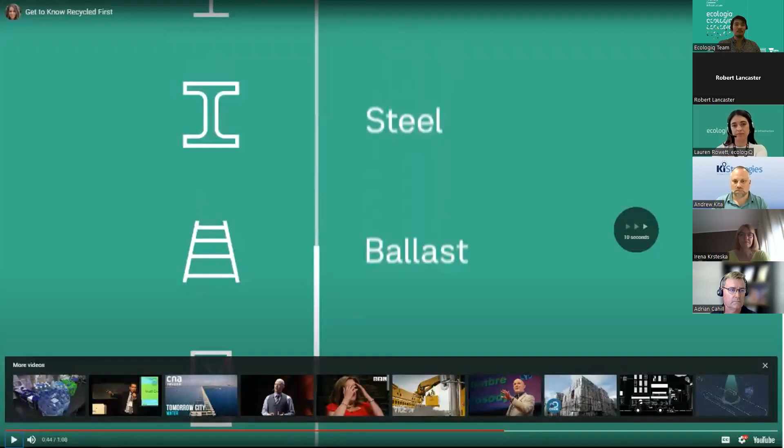But where does the change to green thinking begin? The Recycled First policy. Recycled First will require transport infrastructure projects to optimise the use of Victorian crushed brick, crumb rubber and reclaimed asphalt pavement, taking precedence over virgin materials.

For information, technical advice and support on bringing your sustainable project innovations to life, drop ecologiq a line. Recycled First, supporting purposely greener infrastructure.

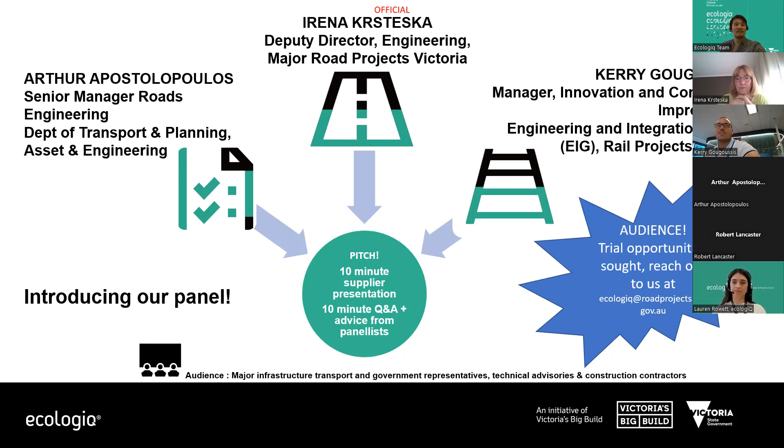So as you can see, very much a collaborative approach. These events are very much a call to action, because out there in the audience, you're working on live projects. There's opportunities to really push innovation, drive the uptake of these materials beyond compliance, as well as making them business as usual. Whether you're an asset owner, or working with design, engineering, construction, the ecologiq here is very much about leveraging the big build opportunity and your projects to see circular outcomes for Victorian industry.

So I just want to go through a quick whirlwind tour of previous showcase participants. About 2 years ago, when we kicked off this series of events, we had a social enterprise called OC Connections put forward the idea of collecting old road bollards to convert them back into new ones. They launched at the end of last year. That's now available, so you can go onto their website, and we're happy to see these bollards starting to be rolled out across the big build, as well as Melbourne Airport and some other areas.

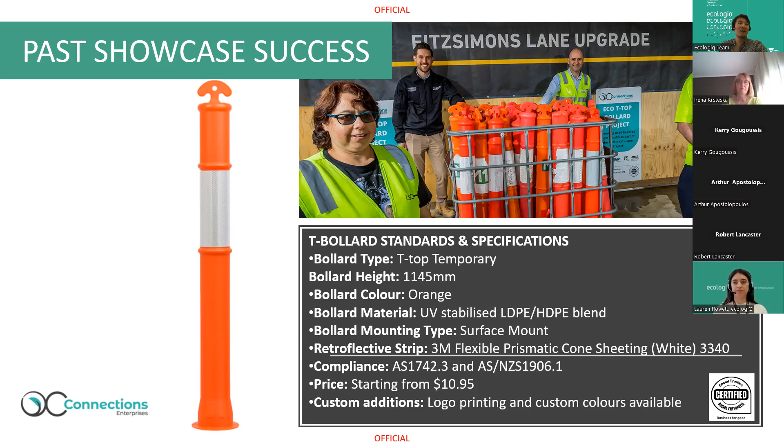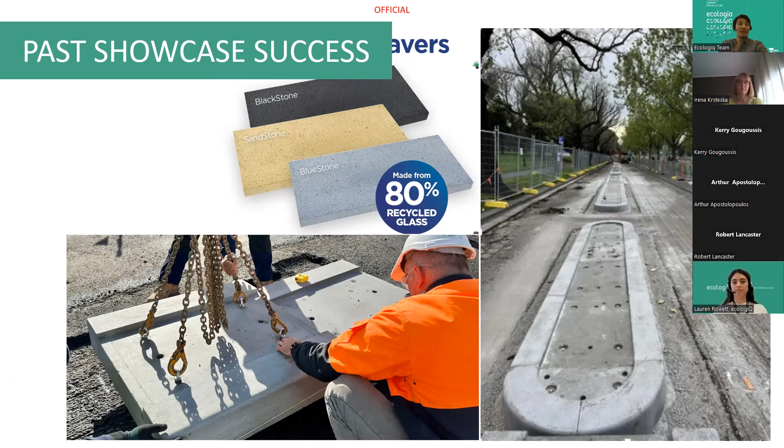Through the series, we've worked with the Plastics Industry Pipe Association, and we brought recycled plastic conduit pipes into the market here in Victoria. That's also available for projects working in the space. Vinidex is one of the manufacturers for these plastic pipes. We've also seen innovations such as Orca Civil's polymer concrete with recycled glass being used on the St Kilda Road laneway project, as the lane separators for the bike lanes there. Again, a showcase participant that's seeing that uptake.

I also want to take this opportunity to remind you, or if you haven't seen these before, plenty of innovations that we're hoping to see adopted by the big build and your projects. The University of New South Wales Smart Centre have developed a great product called the Green Ceramic. This is a ceramic made from textiles and recycled glass. It meets Australian building standards, so that's available.

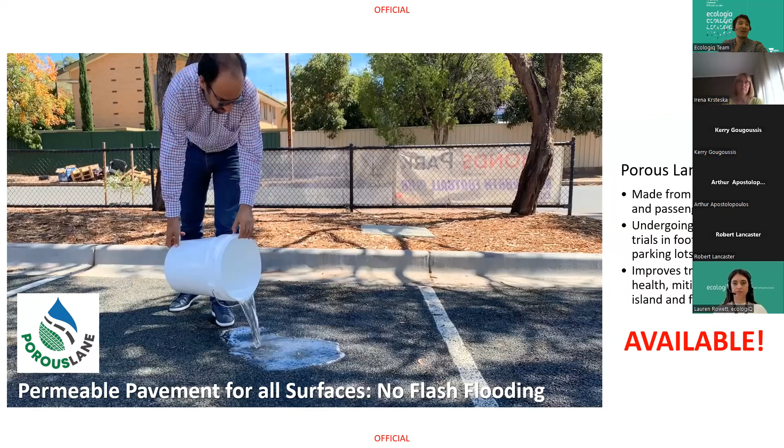We've had Porous Lane, a company that takes end-of-life tyres and creates a permeable pavement that can be used in car parks and others. I think some local councils have trialled it, and one of our projects is looking at adopting that. From a flash flooding and heat mitigation perspective, great product.

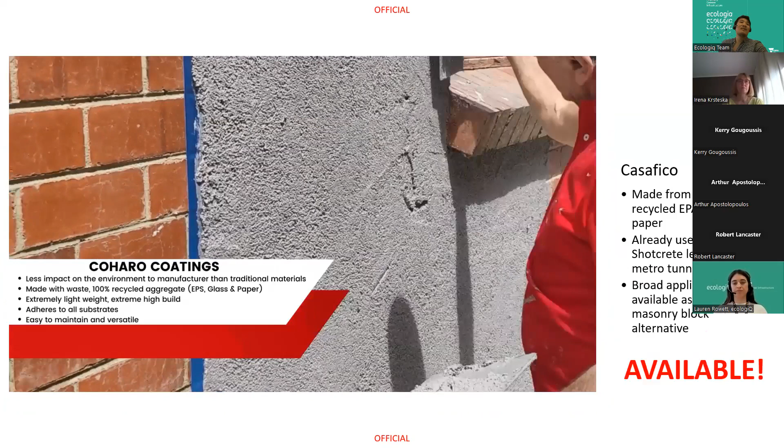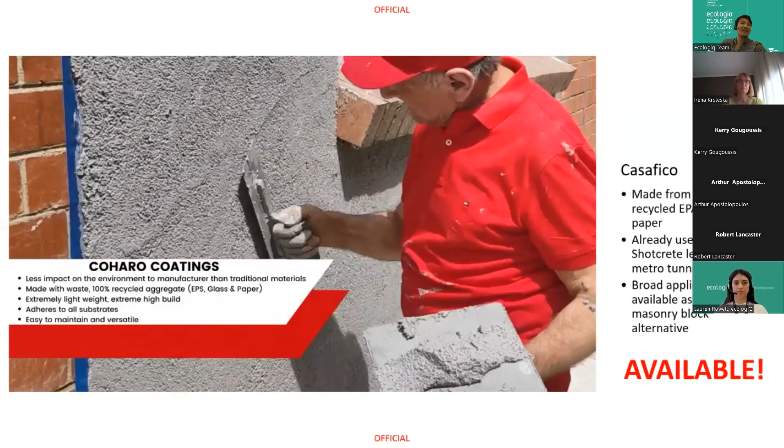We've got Casafico, who take polystyrene and other construction waste to make a levelling coat. It's a shotcrete - you can see it's a very lightweight product that can be used to render and smooth out surfaces. They also use that same product mix to create building blocks, which are significantly lighter than traditional building blocks, and come with not just green credentials, but safety ones as well when it comes to lightweight building materials.

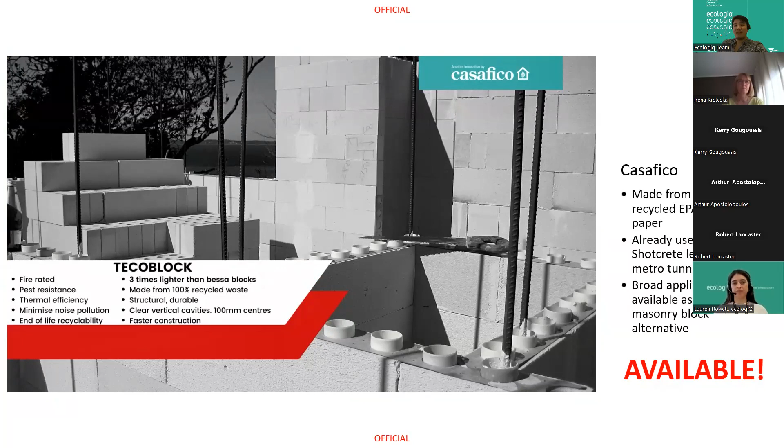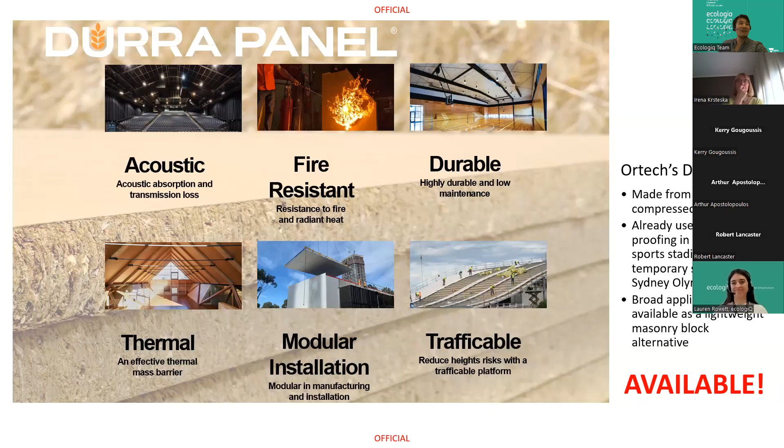Sometimes the innovations are very simple. This one's been around since World War II here in Victoria. The Durra panel, made by Ortech, is made from compressed straw. This can be used as acoustic panels and building panels, and it was actually used in the Sydney Olympics - with the Commonwealth Games coming up soon, I'd love to see this and other similar innovations adopted again here in Victoria.

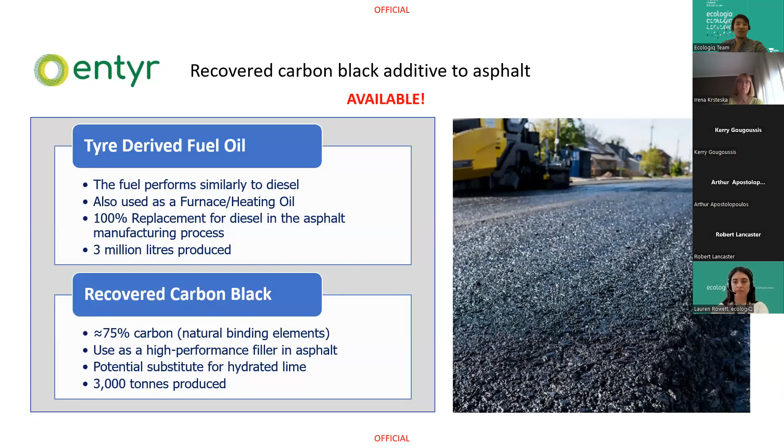Just last year, we had Entyr come along with their carbon char product - this is an asphalt additive. We're looking to trial this as a hydrated lime replacement, so we're expecting to see improved rutting and increased lifespan of the asphalt. This product is coming to Victoria; I think Alex Fraser at the moment are looking at working on a trial to deliver this. So if you're out there, there's a lot of asphalt being poured on our projects - a great opportunity to use and trial this as well.

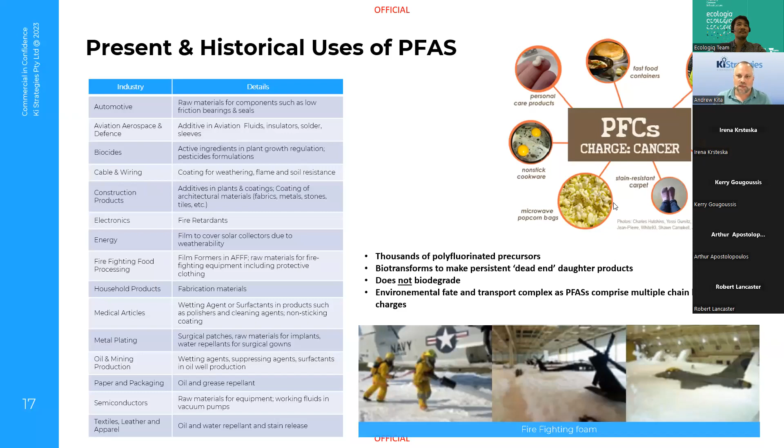We identified an issue in the environmental contaminated land sector where there was no solution for this emerging contaminant of concern, abbreviated PFAS. It's a family of thousands of chemicals that are extremely persistent. They don't biodegrade, they bioaccumulate, and some are suspected carcinogens. As the industry has been phasing out these contaminants, solutions for remediating them, particularly with building materials like concrete and asphalt, just weren't available or being developed. That's really what led us to develop the Ambiolock technology.

So what Ambiolock is, essentially, is a physical, not a chemical, solution to bind and encapsulate PFAS contaminated solids, whether they're recycled concretes, asphalts, sands, or gravels, anything that can be used to create new structural materials like a pavement or a sub-base material. It's very effective at binding the PFAS to such a degree that it physically cannot leach out of that matrix.

It's not a one-size-fits-all solution in that there's no standard dosing. Unfortunately it does vary from project to project, because concentrations of PFAS vary from site to site, as does the distribution of types of PFAS compounds—some long chain, some shorter chain, with different properties. So there is some front-end bench scale testing required, which optimizes the dosing and performance of the solution, and has an impact on the cost as well.

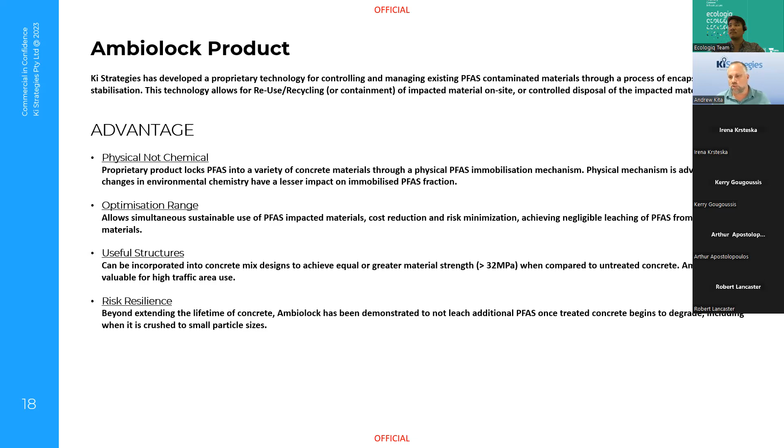But we have been able to successfully create sub-base materials that are many megapascals in strength. We had stabilized sand at close to 40 megapascals. Our 32 megapascal concrete mix has achieved results greater than 40 megapascals, with extremely low permeability and water penetration results, which I'll talk about in a minute.

It's a product designed to meet this industry challenge of waste avoidance, reuse, and recycling. It's something we've spoken about for decades, but industry has been slow to move down that road, particularly with contaminated materials, and there's been far too many of these shipped to landfill, often transported across multiple states in Australia for treatment and subsequent landfill, when these materials could be cost effectively and environmentally incorporated into useful products or structures that provide the community with significant benefit.

One of the things we've been able to achieve is reducing the carbon footprint associated with using concrete as an encapsulation or stabilizing agent. We know the cement industry is one of the largest emitters of CO2 globally. Ambiolock, when used in a concrete or stabilized sub-base material, is able to significantly reduce the amount of Portland cement required or equivalent binder.

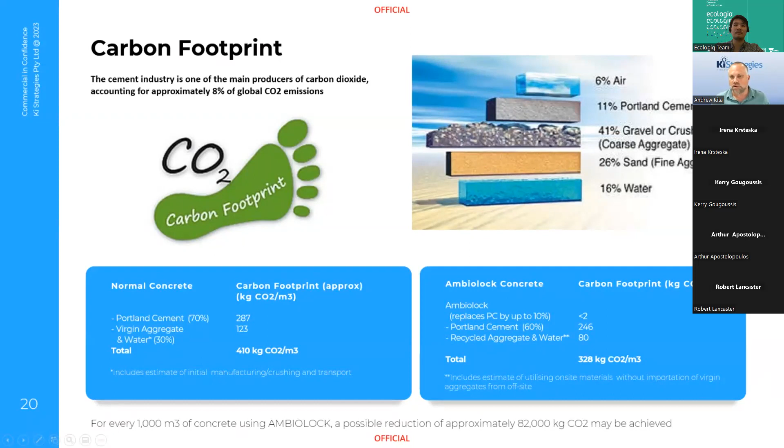Through the use of recycled aggregates, we reduce the footprint even further, as opposed to having to import virgin aggregates from offsite. We believe a saving of around 20% in CO2 is achievable, possibly higher with stabilized sand and other materials where cement replacement can be greater. We think for every 1,000 cubic meters of concrete using Ambiolock, the savings are roughly 82 tons or thereabouts.

So essentially, there's no limits to what Ambiolock can be used for. Any product that requires cement, concrete, and similar cementitious matrices to construct, be it roads, pavements, all types of structures, it can essentially be used anywhere where concrete is currently used. So the range of potential reuse and recycling options is extremely large.

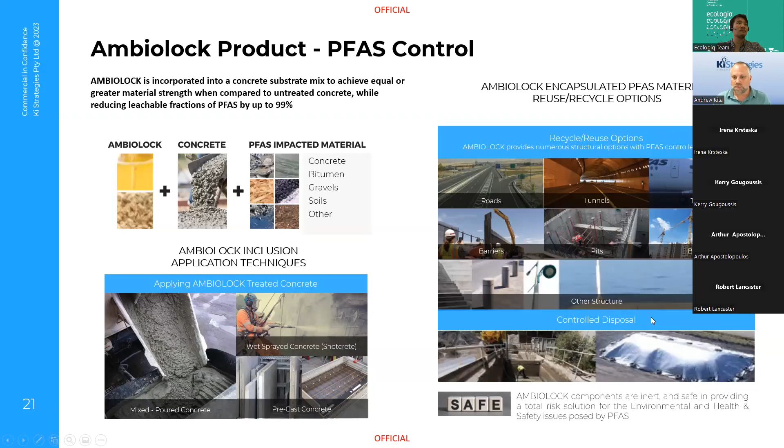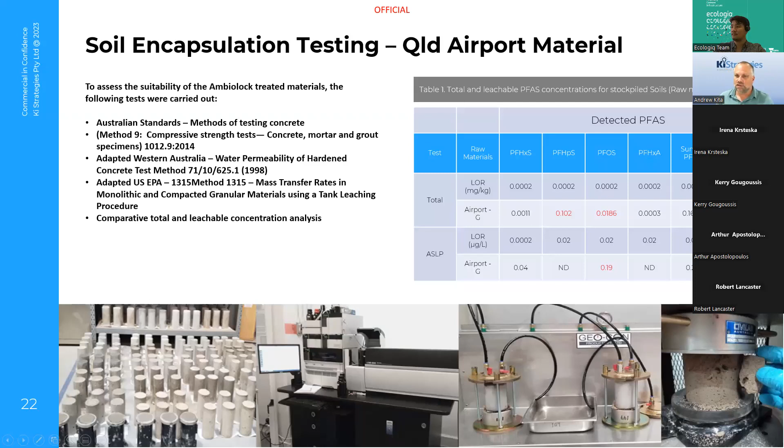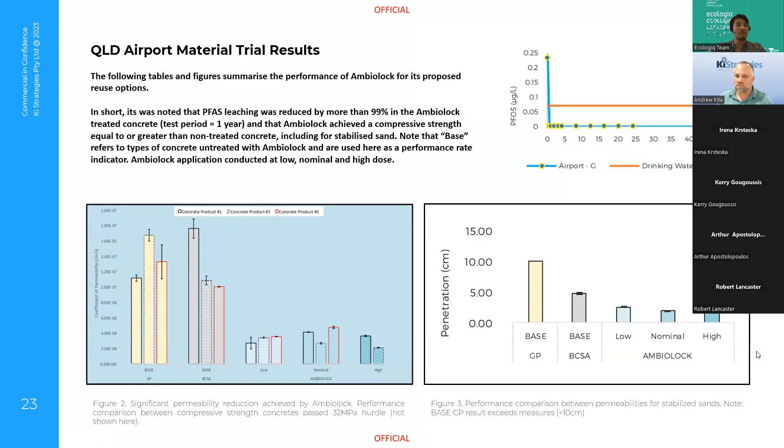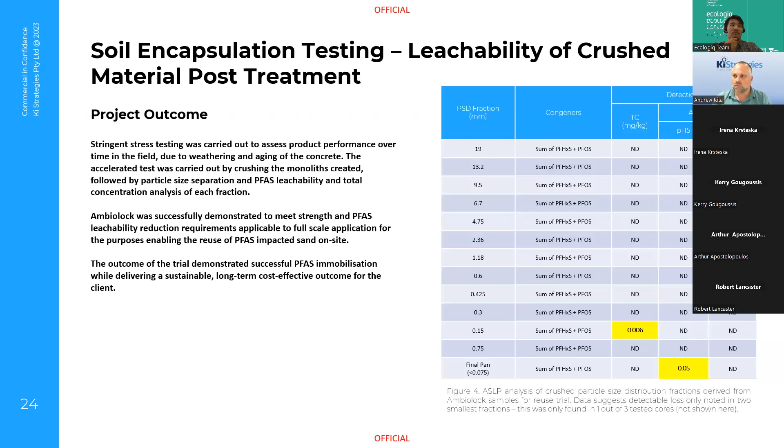Just to summarize - there's a lot of considerations to be made when it comes to various projects, but for a small project, we find the cost benefit relative to sending material to landfill is at least break even. For large projects, we see savings in excess of 50% of what landfill disposal would cost to utilize those materials on site, sometimes well greater than 50%, whilst also providing a very effective environmental solution with other social benefits.

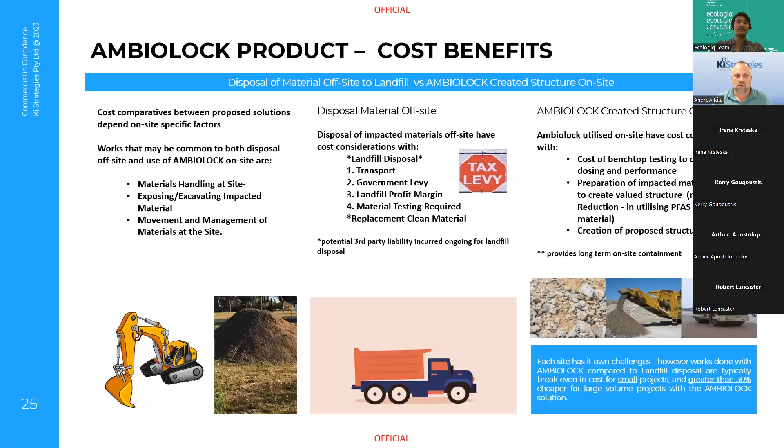Along with the partnerships that KiStrategies has. Next slide please. So this is the final slide.

Just in summary, it's a solution that's not limited to PFAS, although that's been our focus because it's an area where there's been significant industry need. It is viable for other contaminants as well, and also works extremely well with concretes that have rapid set additives and cure in 24 hours or shorter, with no loss of effectiveness in terms of the leaching reduction.

A little bit about our motivation: the essence is we have a drive to take the plastic waste problem of the world and upcycle it to actually utilise it in a way that has environmental benefits and also social and economic benefits. So that's our driver, and the way we're doing this, if we go to our next slide, thanks.

It's through our lightweight eco-aggregate that we call RESIN8. A couple of key takeaways: we accept all types of plastic, resins 1 through to 7, and we can take that plastic waste stream in a commingled and even dirty format. We were born from a desire to do ocean cleanup, so that's the sort of waste we started with, and we continue to utilize all forms of plastic waste. We don't just convert it into an aggregate that we hide in construction materials - RESIN8 is an eco-aggregate with standalone construction credentials. It has structural credentials, thermal values, fire rating improvements, it's lighter to work with, and of course has incredible environmental benefits. So that's what we're doing, creating RESIN8, our eco-aggregate.

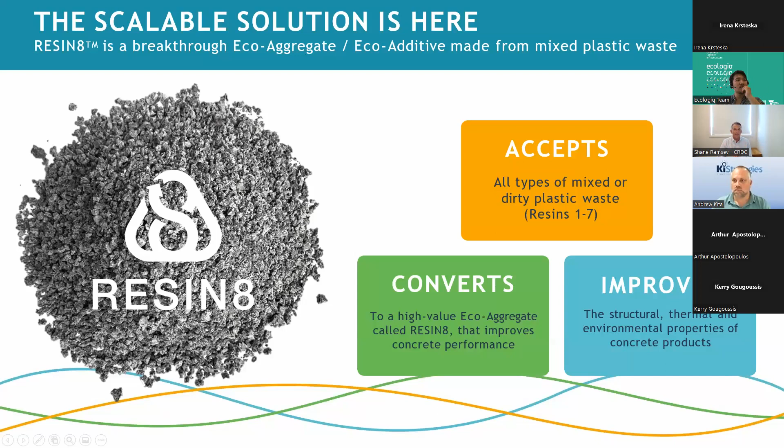Let's have a look at our next slide. Thanks, Billy.

So where is our plastic coming from? Currently we have full-scale commercial operations in South America, South Africa, and the United States, and pilot plant operations in Europe, Hong Kong, and Southeast Asia. In the coming months we'll be commercialized and operational in Melbourne, Victoria. The waste streams we'll be accepting from the Victorian community will be exactly what we're accepting globally, which is industrial waste - post-industrial waste that often goes straight to landfill, agricultural waste that often goes straight to landfill. We take all of that, plus environmental waste.

I mentioned that was a real driver for us as an organisation - ocean cleanup, river cleanup waste, it's mixed, it's dirty, and it's often not recycled. We take all of that waste, and we'll continue to do that until environmental waste isn't a problem. So that's a driver for us. And domestic waste - we take plastic waste from the domestic market. In the United States right now, we're running a full-scale project with a full-scale operational plant just outside of New York, where we capture all the waste of one community.

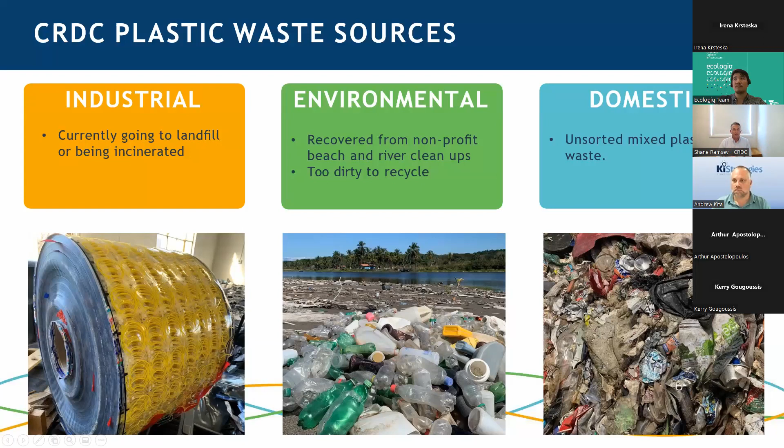And then that waste comes into our plant and is converted to RESIN8. That municipality then supports the purchase of RESIN8, which goes into their civil projects. So we've created a circular motion there, where the waste becomes part of the community's projects that enrich and appreciate the community.

Precast concrete—right now we're in some large civil projects in South Africa: pipes, pitch drains, tilt-ups, and we have all the real-world testing data there. And of course, pour-in-place concrete, which we're engaged in, from structural to non-structural applications. So that's just a snapshot of what we're engaged in.

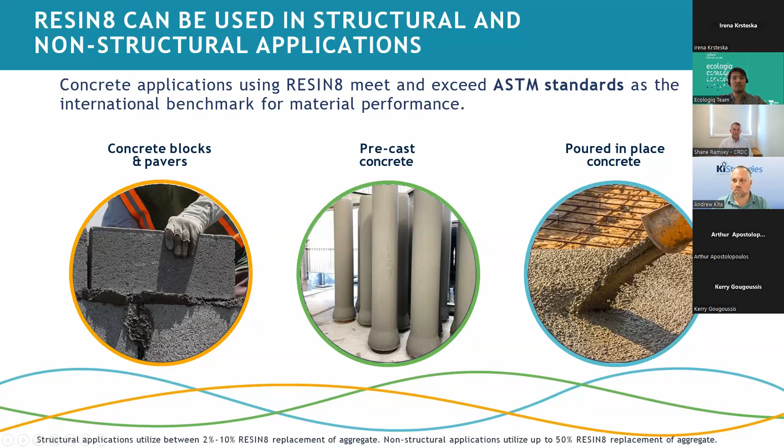We've spent quite a few years rigorously testing RESIN8 and CRDC as a company. We've mentioned ASTM testing, American Standard testing, as an international benchmark because we're globally rolling out RESIN8. But we acknowledge the Australian standards are equally high and stringent, and rightly so. We reference these because we've done thorough testing for fire, thermal, and compressive strength, and we're doing that right here in Australia.

Right now we've partnered with Southern Cross University under the Commonwealth-backed Recirculator program. We're building a pilot facility in northern New South Wales, engaged in a two-year testing regime which includes all the testing we've done globally, including our LCAs, and we're running them again here in Australia—LCAs, leachate, microplastics release.

The takeaway here is that once RESIN8 is in the concrete, it's not there as a volume expander—it actually mechanically and chemically adheres, becoming an integral part of the matrix. The appearance stays the same, the workability stays the same, the end use looks exactly the same, with all the benefits that come with it.

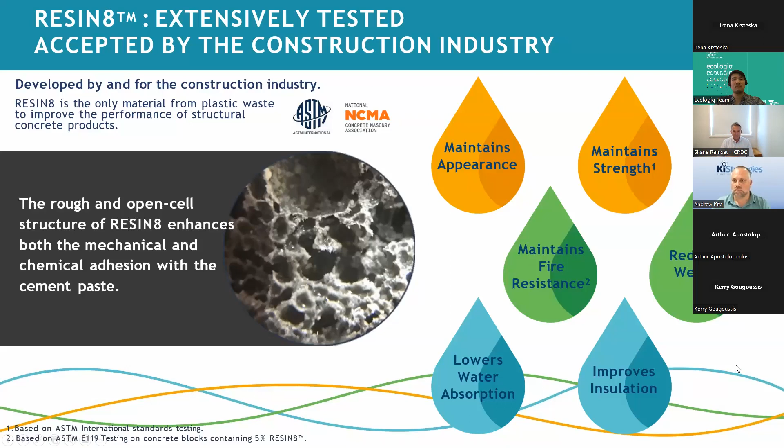Some here will have a real environmental focus, and others will carry the weight of responsibility for construction and structural integrity. I think everyone here has probably married those two motivations together—construction and environment—and as a company, that's key for us. We've had a focus on our construction credentials, but we're driven by our environmental benefits, and this slide highlights some of them.

The leachate and microplastics release I mentioned—we're thoroughly tested and documented and sailed through those tests. But the key one: we take all plastic, divert it from landfill, and utilise it in a construction commodity that has real value. That's just an environmental snapshot.

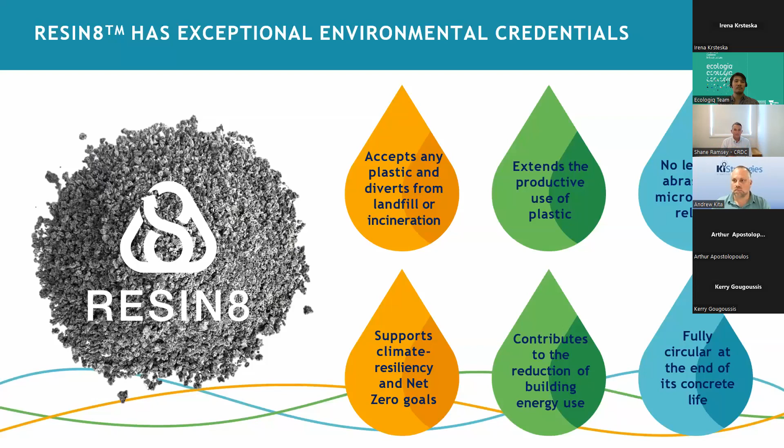We've educated the community on how to manage their plastic waste appropriately, and now their plastic waste is becoming their neighbours' homes. That's something we're really proud of, working with Habitat for Humanity, and it speaks to our motivation to create a circularity where we eliminate as much plastic waste from the environment as possible, and make something of value with what we're left with.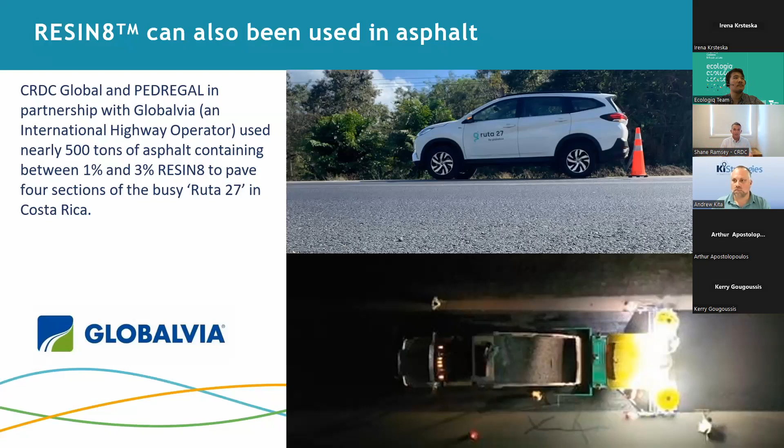And just our final slide. I think that's it, actually, Doi. So friends, I guess the point we're highlighting is we've got the runs on the board, but we have a real desire to do it here in Australia. And one of the questions from Ecologiq is how can we move this down the road?

Well, with our full-scale plant coming online in 2023 in Melbourne, we acknowledge the support that Ecologiq already provides around standards, support with standard specifications, compliance, and standard development in light of recent innovation. So we're looking to continue those relationships and really draw off the experience of the industry. What do they need? How do we comply?

And then to go in harmony with that, what we're looking for in Australia is the opportunity to walk into real world projects, to actually roll out RESIN8 in real world testing applications, so that we're not blindly saying what we think it's going to do, but can build off our global experience so we know what we're expecting. The companies we work with know what to expect, but we can demonstrate it right here in Australia with Victorian waste in Victorian projects using Victorian construction methods. And that's where we're leaning on you and your organisations to help us.

Thanks, Doi. Not a problem. Thank you, Shane. Over to the panel. Any first takers? Otherwise, I might go alphabetical.

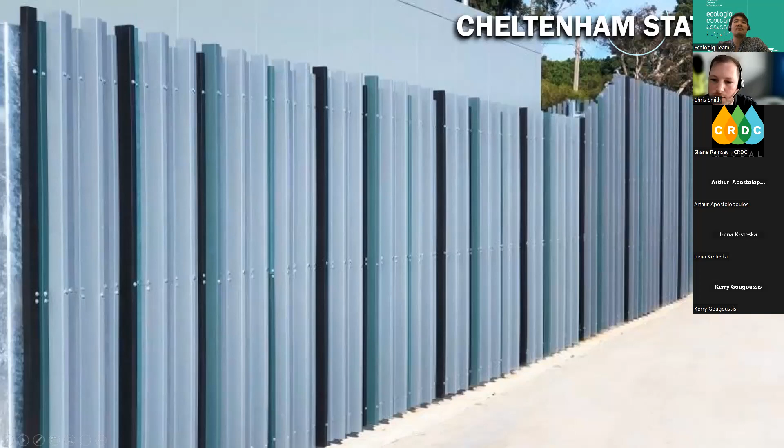The rest of the slides are all Ballarat product, made by us. This one's a good example of our profiles. We make a number of rectangular and square dimensions, for want of a better word, plastic lumber gets used a lot, but this is a creative use of it. This was a level crossing removal in Cheltenham, where they've used the profiles as vertical battens around a substation. Not only have they utilised a single profile, they've used a number of different dimensions to create visual interest, with the profiles jutting out from the fence railing, as well as alternating colours to create patterns. This isn't an overly uncommon use for our product, but I don't think it's advertised a lot, so I thought it'd be interesting to show.

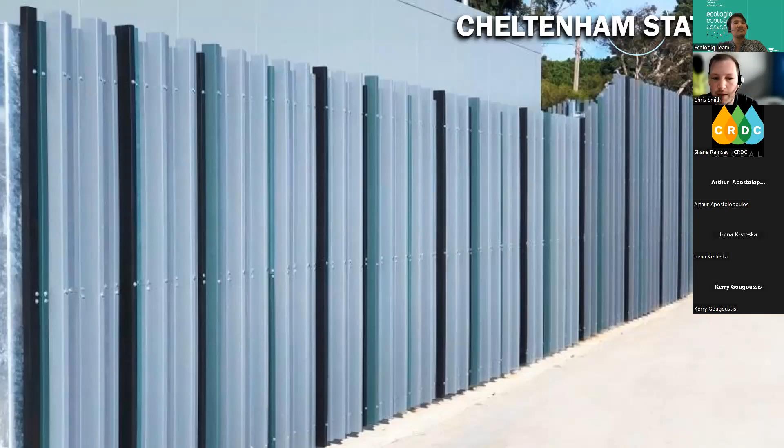That's due to the angle of the ramp being quite steep. At that stage, we couldn't create the anti-slip surface on top of our EnduroPlank, so they came up with that solution for that installation.

I was there about a month or two ago and looked at the EnduroPlank underneath those anti-slip plates. It still looks the same as the day it went in, barely worn at all. That's one of the advantages of utilizing plastic in any of the forms we've discussed today - it's such a durable, long-lasting material. That's one reason it's an issue in the environment, because it doesn't break down or degrade. But when you put it into a constructive use, that becomes an advantage.

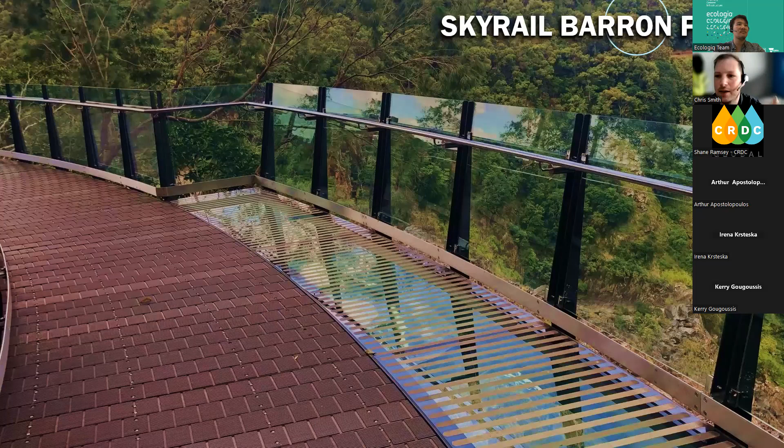So that's one of our main infrastructure installations in Victoria. On the next slide, if we hop across, is quite a high-profile one in Queensland. This overlooks a big gorge on a tourist attraction and walking trail in northern Queensland - it's Barron Falls.

This is cantilevered over a cliff, I believe, and they've used our brown EnduroPlank as part of the installation. You'll find a lot of these installations use EnduroPlank just due to its durability and long-lasting aspects, because it doesn't need the maintenance - it doesn't have high maintenance requirements. So for things with high traffic, low maintenance is obviously a beneficial aspect, meaning you don't have to continually go back and repair anything.

And for this purpose, it's great. This is - yeah, that's all right. Yeah, stay with that one.

Interestingly, one of our former directors, Mark Jacobson, used to say you'd worry about it getting dirty because it's white, but because it's plastic and non-porous, all the people sitting on it and rubbing against it all day with their suits somehow manages to clean it every time they sit and get up and shuffle along. So it looks stunning - still looks great. I think that was about 4 years ago now, before COVID. It's a fantastic example of a creative use.

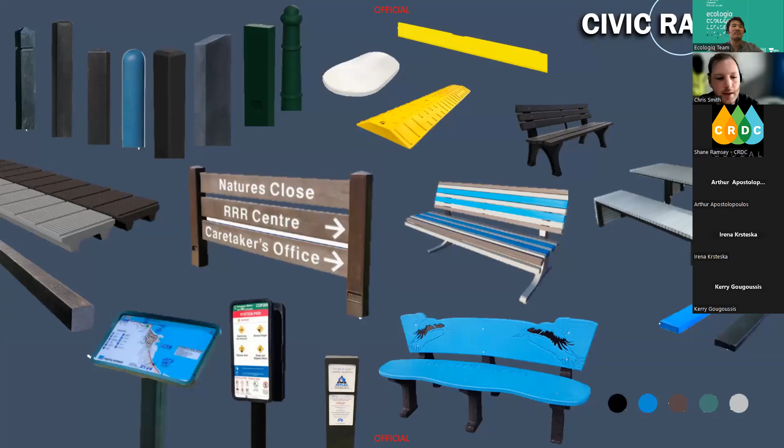On the next one, we move into the range of products. We've got two arms to the business. The one we're best known for is our Civic range - furniture items, decking, and bollards, our three core product ranges. We also do profiles, different signage, and a few traffic control items like wheel stops, which is a growing market with a good chance to succeed and become another core item like the bollards.

I've added down there the color range that things can come in, but this is just a brief summary of the products we do. In total, it's over 200 that we make, including the next slide.

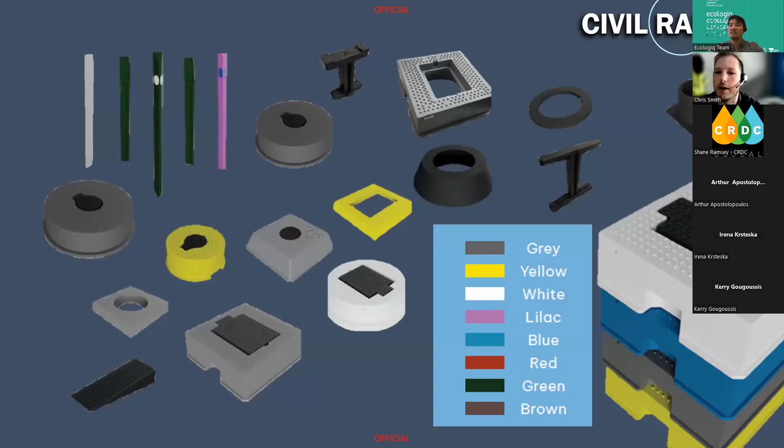With our products, especially the civil products, you can see some of these designs are a bit elaborate in terms of the shape of the product and the texture on top. That just goes to the strength of what we're able to do with our injection molding, and it leads on to the next point I was going to raise.

We'd love to work with you, and we invite all discussions on products. Whilst we've got a standard range of products that we make, we're also open to discussions on products that may be required in high volumes or custom situations that we can work with any of the big build projects on. So if there's something that has piqued your interest, or you've got an idea from left field that may be useful, definitely come to us with the discussion, and we can investigate whether it's something we can assist on. And that's it.

Perfect timing, Chris, that's 10 minutes, so thank you. And great to see it used in such amazing locations.

I think Arthur, since you've got your camera on first, fire away.

Okay, thanks Chris. Again, very good presentation, and I think there's plenty of opportunities in that road furniture space where your product can be utilised, and that's where we should be concentrating on. Again, in the off-road space, there is a plastic noise walls specification that's being produced at the moment, and you're probably aware that a number of noise walls have been constructed out of recycled plastic. So that's just for your information, you may have already looked at it, but that's another avenue where every time there's a big build, there's likely to be noise walls installed as part of that. So what you've presented is very good, well done.

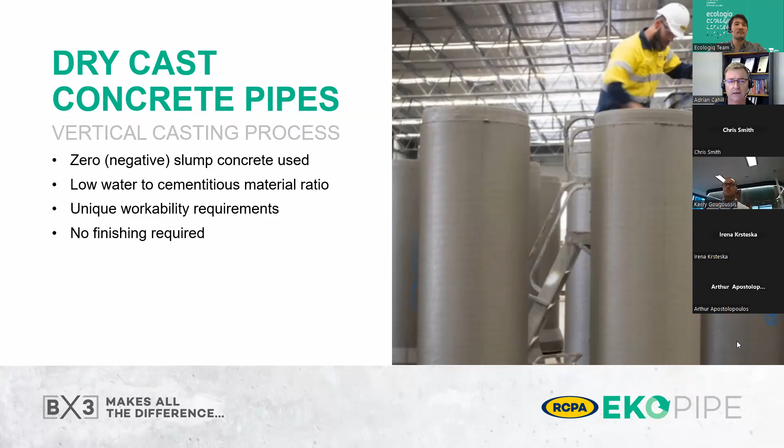But that's about it. This process is also used for items such as concrete masonry blocks, concrete pits, and a range of other concrete products around the world. So, next one please, Toy.

So I just thought I'd touch on what we're talking about here. RCPA has developed a product called EKOPipe, and we've named the technology behind that BX3. There's a reason for it, but I won't dive into that today. But we want to flag this, because people may not have heard of RCPA. So people sort of go, well, who's RCPA? Why have they been able to develop this concrete pipe? It hasn't been one of the majors that's come up with this.

Part of the reason is that dry cast pipes suit this technology more than traditional concrete. Due to those workability and finishing requirements being different, that gives us the opportunity to introduce processes or materials into the concrete mix that may not work in a flat work or a different kind of precast operation.

The other part that is significantly different, and I'll talk a bit more about this in a couple of slides time, is that pipe's a fairly unique structure in that we actually test every batch of pipes that are made. There's a physical load test that's done usually multiple times per day. We test the concrete pipe itself to ensure that it's achieving its required structural performance.

Yep, next one please.

So I'll talk a little bit about the development. If people who've been around Victoria for a decade or more may recall, RCPA did actually introduce a product called ECP, which was a full geopolymer concrete pipe, probably around 12 to 15 years ago. The problem with geopolymer and traditional alkali activated concretes is they're not very user-friendly, in short. They use some pretty aggressive materials. I know there's been developments and changes with powder systems nowadays, but they are significantly higher in alkalinity than standard concrete.

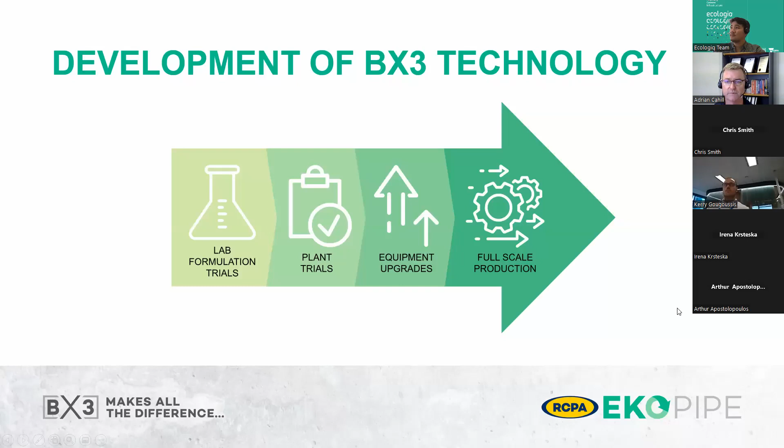So once we had the lab concrete working in the laboratory environment, we moved to plant trials, and it exceeded our wildest expectations in terms of how well it worked. We were pretty much then in a position where we needed to immediately move to do some equipment upgrades to get us into full-scale production. Now that's actually been a bit of a challenge with all the fallout from COVID. A lot of our equipment comes in from overseas, so it's taken a bit longer than we would have liked, but we're now in a position to start scaling up into full production going forward.

So in terms of what do the numbers tell: we've done an initial assessment, just waiting on publication of an EPD for our standard concrete pipes, which establishes the baseline numbers you can see in the tall charts there - kilograms of CO2e per tonne of concrete produced in 3 of the plants we've assessed.

That's achieved through greater than 80% reduction in Portland cement, depending on the location - there's a bit of variability there, and we're talking about concrete that's actually being made in those plants. These aren't abstract numbers, they're real numbers, and it translates to a greater than 50% reduction in the CO2e for the concrete itself.

Just before we move to the next slide - when we make the pipe, we're using steel as reinforcing. While a substantial percentage of that steel is recycled material, there's still a CO2e contribution from the steel that goes into the finished product. What we land on for the finished pipe, varying depending on pipe diameter and pipe class, is around a 45 to 50% reduction in CO2 for the actual pipe as produced.

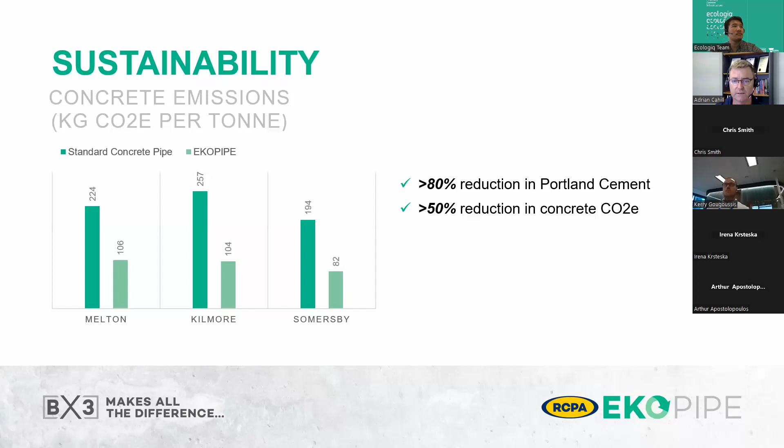So in terms of next steps, as I mentioned, we've got the EPD just awaiting final verification and publication through EPD Australasia. Hopefully that'll be done in the next couple of weeks.

We will be developing an EPD for EKOPipe very soon. We just need to get a few more production runs under our belt, so to speak, and continue gathering data to develop that EPD.

Future work - we're not going to stop now. We've had a really big win in terms of the cementitious content, but there's a lot of opportunity to look at alternative or recycled aggregates. I'm pretty interested to talk to Shane from Resonate in due course about that.

One thing that doing an EPD or life cycle assessment does is give you very good insight into your energy inputs through the manufacturing process, and that's a big contributor to the EPD or CO2e for pipe manufacturing - the actual production process. So we look to optimize those energy inputs and introduce elements such as solar through our factories.

And then optimize concrete mix designs, continuing to work on that. We see this as being just the first step in a longer term road around developing our BX3 technology. Yep, next one please.

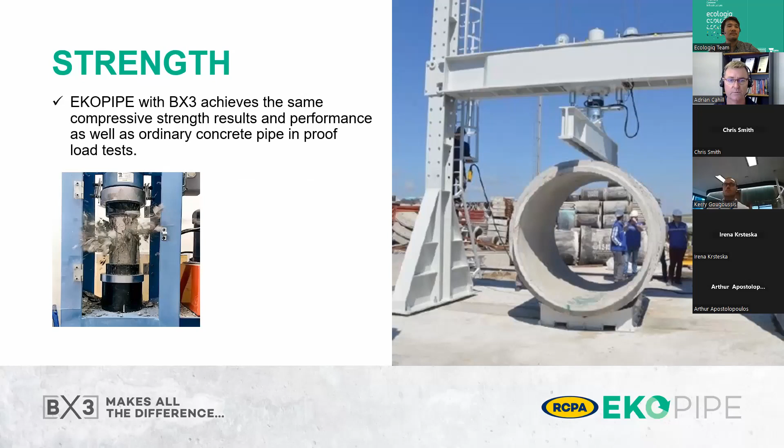We typically run strengths in the sort of 60 MPa territory at 28 days, and we can easily achieve that with our EKOPipe concrete. In terms of proof load testing, it's equally as good, so there's no compromise there. Now you can go next, thanks.

The other test is durability, and durability is the big word, right? There's no point saving a bit of carbon, whether using recycled material or not, if you have to replace that asset in less time than the original one. Any gains you get there can be easily lost through extra maintenance or replacement. So durability is the key thing.

The key test used in the Australian standard for pipe manufacture is the water absorption test. It's akin to the VPV test for those concrete technologists in Victoria, but slightly different. What we do is take the test sample from the wall of the pipe - we don't use a cylinder cast in a mold, we actually take a sample from the pipe itself.

On the right there is the limit in the standard, which is 6% absorption - that's what we're allowed, we have to be below that. Our typical concrete ranges in the order of 4 to 5% testing. Our tests with EKOPipe concrete to date have been almost half, so we get absorptions of 2 to 3%. For those familiar with VPV numbers, we're generally in the single digits, around 8, 9%. So very good numbers for that.

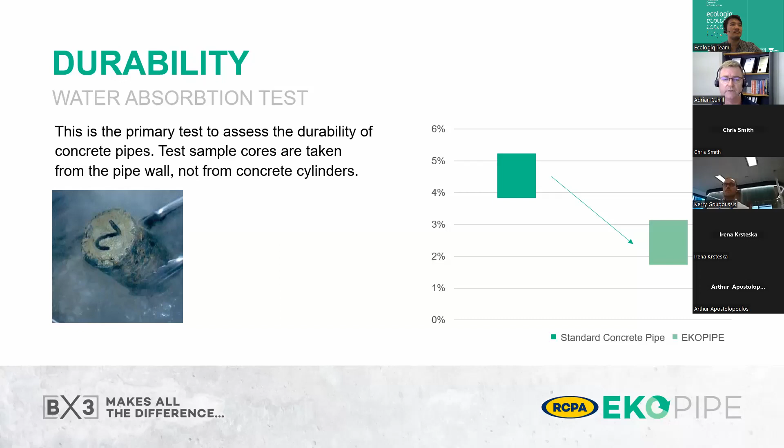And to make sure we are looking at the broader picture, not just focused on pipe concrete, we're also doing testing on chloride migration, confirming that the EKOPipe cementitious binder still functions as an alkali silica mitigation, and continuing to investigate other attributes there.

So I just wanted to say, in summary, RCPA is very pleased to be able to introduce this sort of revolution in concrete pipes. We're certainly one of the first in the world to introduce a concrete pipe with a significant reduction in Portland cement usage. We recognise that concrete continues to play a critical role in our built environment, due to the fact that it has those unique and proven properties and an almost guaranteed service life if correctly installed. So we're really pleased to introduce EKOPipe with BX3. We have dropped Portland cement use quite significantly, introduced a significant reduction in concrete, and haven't compromised on the strength or service life that you expected.

Very keen to partner up with asset owners in Victoria and across Australia to get this new product in the ground. So yeah, thanks for the opportunity to present, and I'll welcome any questions.

Thanks, Adrian. Arthur, I think you may have pipped Kelly to the post.

Thanks, and thanks, Adrian. Certainly another very good presentation - they've been excellent today. As you're probably aware, Adrian, in Victoria, supplementary cementitious materials have been able to replace GP cement since the early 90s, and a number of our specifications allow the use of that product. So certainly from a Department of Transport and Planning point of view, we're very supportive of these types of initiatives and innovations. That's very good, well done.